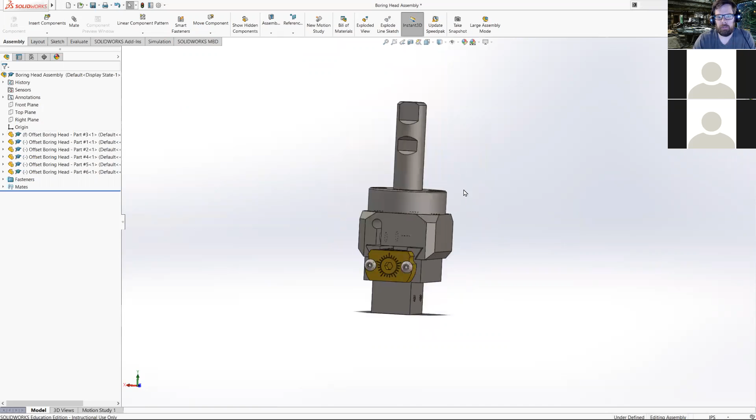All right, so yesterday we talked about how to create our assemblies. We talked about mates, and kind of the big takeaway yesterday, I think, with mates is they really behave just like sketch relations do. So that's kind of a better way of...

Hold on just a second, I'm going to... there we go. So that's they work kind of the same way, right? So we are creating, in a sketch, we're creating relations from a line to a circle, right? So like a line being tangent to that circle, that's our relation. How long the line is, right? That's a relation.

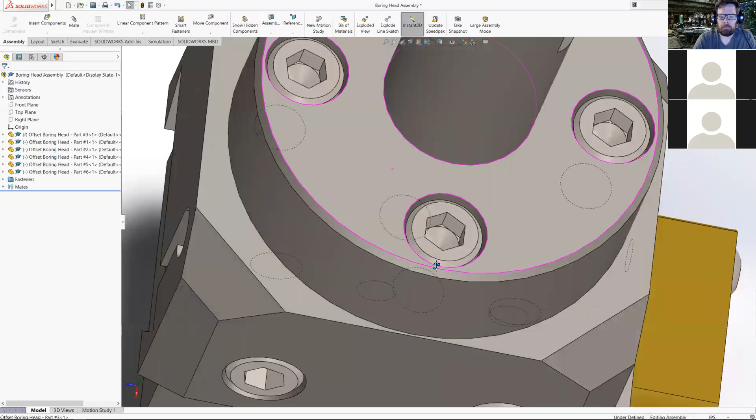So in assemblies, we're basically doing the same thing. It's just instead of having a relation between two pieces of geometry - a circle or a line, or two lines or two circles or whatever that may be - now we're creating relationships, or mates, is what they call it in SolidWorks. These mates are what our relationships are between our parts. So like that screw is concentric with the hole that it's in. The bottom of that screw is coincident - it's occupying the same plane as the bottom of the counterbore.

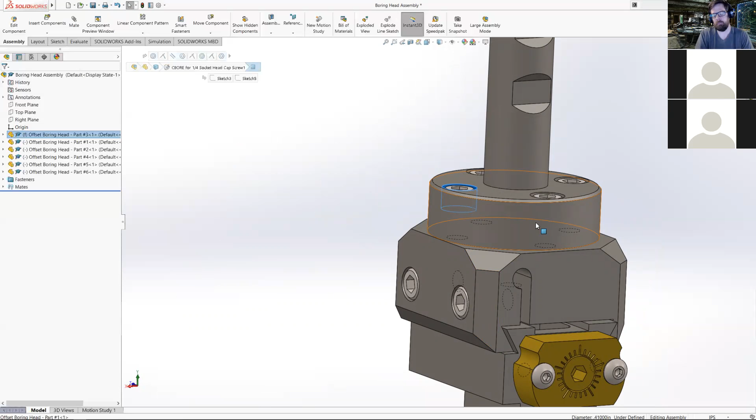So as mechanically inclined people, we should be able to look at these and infer - well, I know how this part's going to go together, so I can look at my mates and hopefully figure that out.

Another thing to think about with mates and relations is it really kind of ties in with GD&T, right? So a lot of the same terms that we're getting in GD&T, we're also going to have in mates and relations - concentricity, coaxiality, flatness, parallelism. Those are all GD&T tolerancing. I can't remember the name of it, but those are always tolerance in GD&T, or create tolerances.

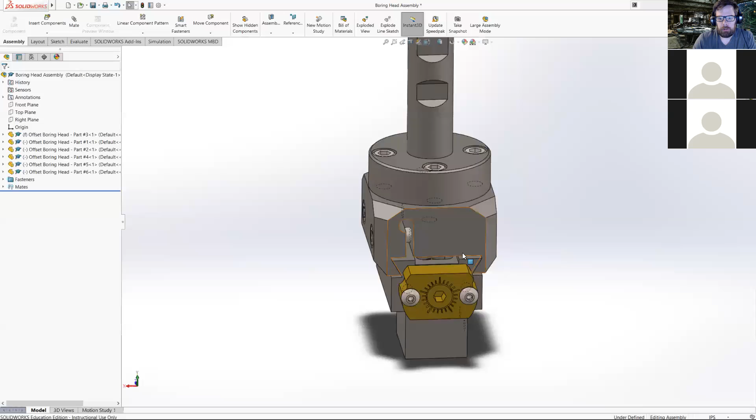So that's kind of another way to think about it. So yesterday when we were going through here, one of the things we noticed was my holes didn't quite line up correctly. They usually should, if we create our geometry correctly, if we create our parts correctly, all of our holes should line up.

But inevitably, something is not going to. So yesterday you saw me - I like to create folders for my fasteners. This is more detail than I typically get into, or more folders - like I have a folder with one screw in it. But this is just to illustrate how I like to do this, especially when you have assemblies with dozens or a hundred fasteners in it. It can get out of hand pretty quickly.

This helps me organize things and also comes in handy for what I'm about to do. In order to evaluate the clearance between the holes in these two parts, I have to look in this hole, but I obviously can't see in there.

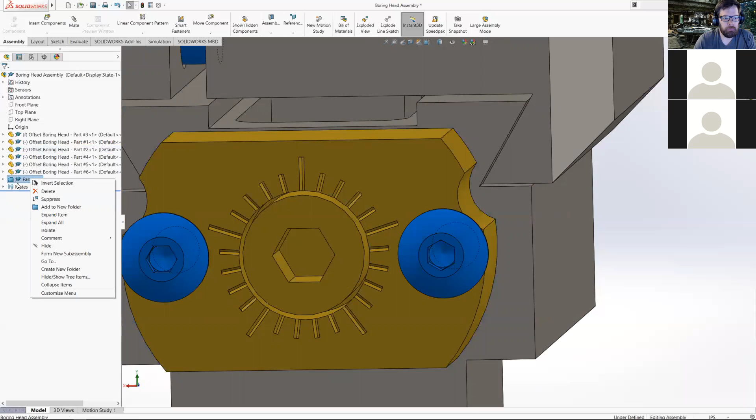Because I added all these into one folder called fasteners, I can right click on this and just hide them all. Instead, if I didn't do that, I would have to go in there and say, alright, these are my 8-32 buttonhead cap screws, and hide them one by one.

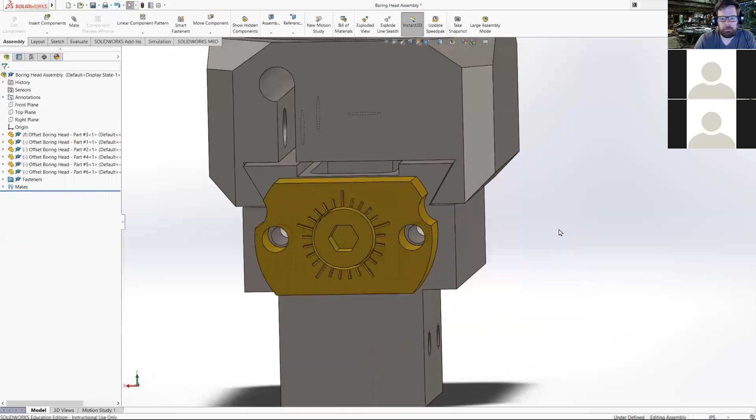It kind of speeds up the process when we have to do stuff like this. Also, sometimes you're not going to want your fasteners in your print - if you have an assembly print, you're not always going to want all the fasteners in there. So anyway, hopefully I'll get square on it.

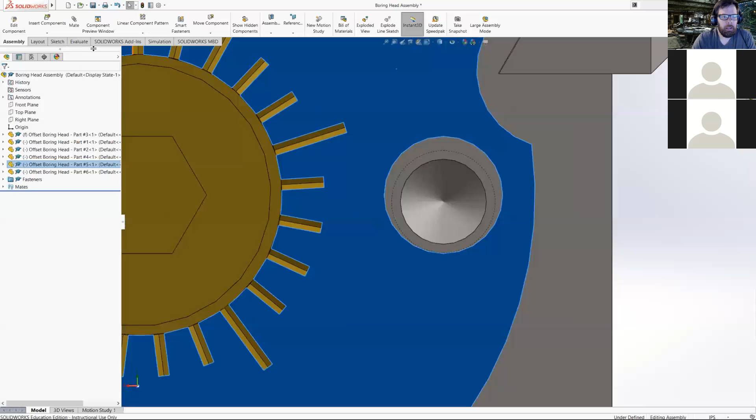My threaded hole does not match my clearance hole, and so I can use different evaluate tools. I can see what the hole alignment is, but really one of the best tools to use for this is our measure tool.

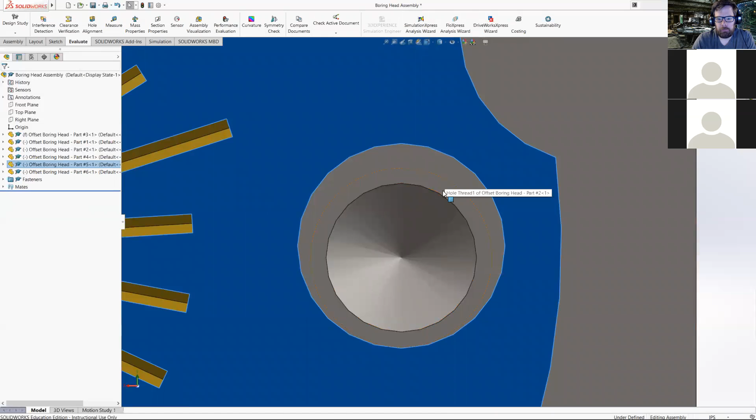One of the things that really alarms me here - does anybody remember what this dash circle around this hole represents? Isn't that the threads? Yeah, so that's the major diameter on our threads, so that is a threaded hole.

There's a threaded fastener that's going to go in there, and this hole is going to determine where this part is spaced on my assembly. So if this shaft is determining where this is located, I can't really push this down to get these lined up, or else I'm going to bind up on the shaft.

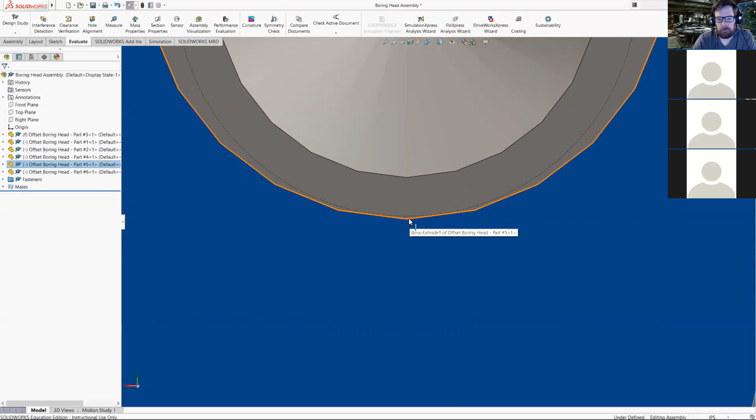What really alarms me is if I look at this, the threaded portion of this hole lines up or is almost tangent with the bottom of that portion. Right off the bat that scares me, that's a red flag, because what's going to happen is when I put a screw in here, my screw is going to be rubbing along the bottom of this if I make it to these dimensions.

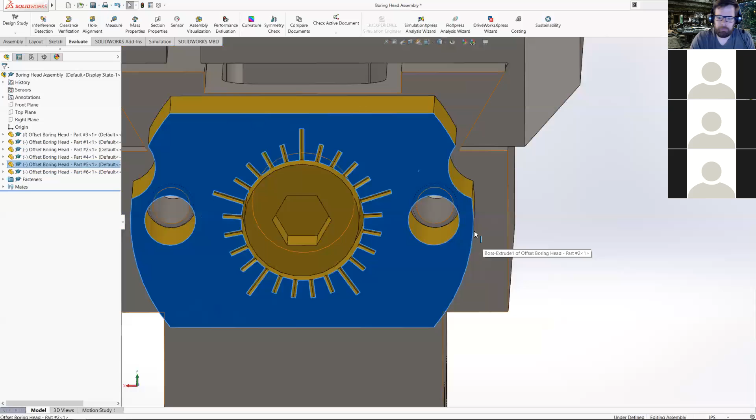I already looked yesterday after we got off and figured out exactly what was wrong. One of the ways we can figure out how misaligned these are is using our measuring tool, which is in our evaluate ribbon. So we go to measure, just up top here.

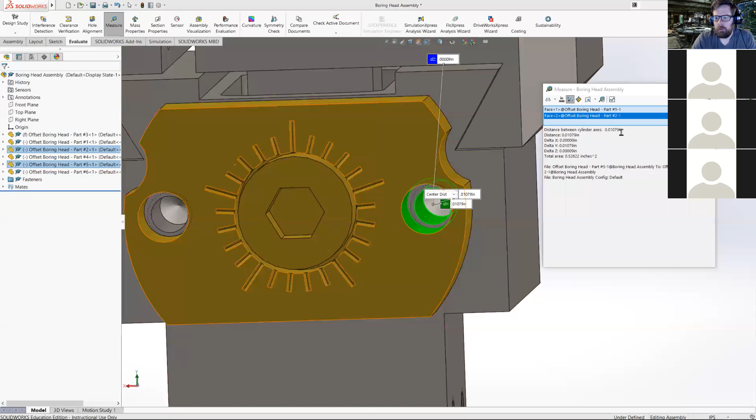Click measure, and then all I'm going to do is select the inside of that cylinder and the inside of this cylinder. Right off the bat we get this pop up - so I am off in Z. Well, that's not very helpful, right?

So Z is going to be going through this hole - our Z-axis is coaxial with these two holes, so the axis of these two holes is actually our Z-axis. I'm not sure what our 900 thousandths is, not really sure where that is coming from, but our delta Y is what we're seeing - the delta Y is about 10, almost 11 thou, that this hole is misaligned.

That kind of jives with what we're seeing, because in a hole that small, I'm probably going to have 15 to 20 thou clearance. If my hole is 10 thou off, and half of my clearance is gone in a hole that has 20 thou clearance, I'm going to be rubbing the bottom of that - rubbing my threads, or cutting my threads, dragging my threads across this part.

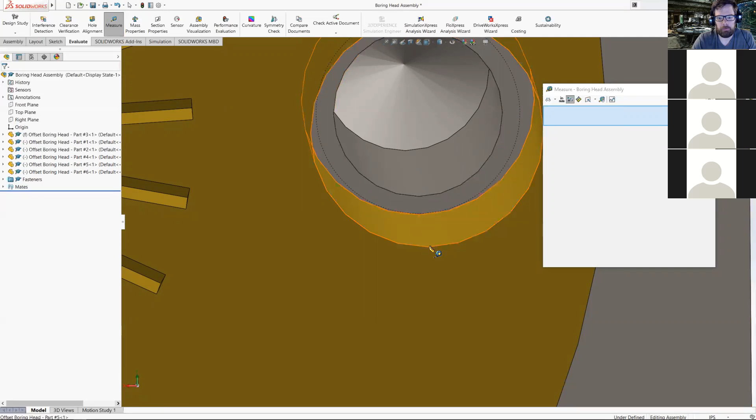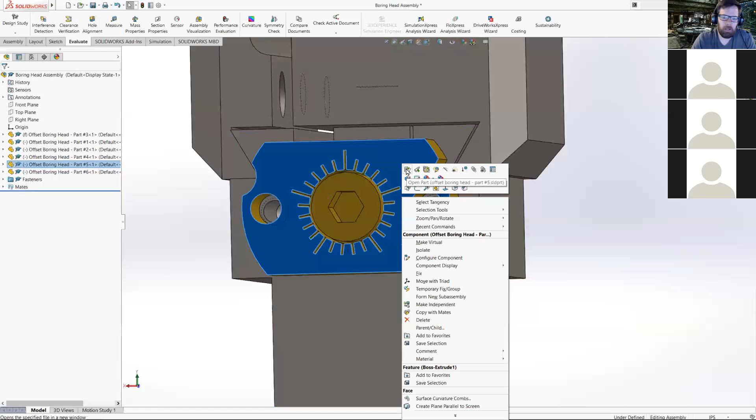So what's the problem there? Well, we don't have to, but we can edit these parts in place. If I right click on this part, I can go to edit part, which is the fourth option, top row from the left in that right click menu. Open part is the first option in that top row, and that's typically what I do. Now I already have these open, so they open very quickly.

But if I look at my print for this guy - oh, wrong one. This is part 5.

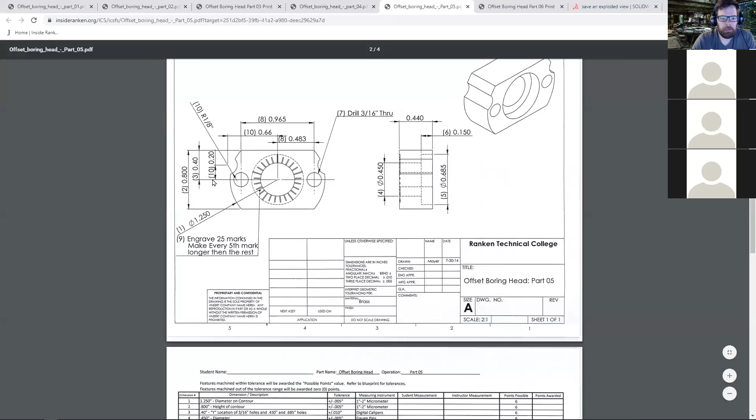So when I look at my print, all 3 of these holes should be aligned, right? I have a big hole and 2 clearance holes, and they're all 400 thousandths from the top of that part. If I look at part number 2, we have the same thing. These holes should all be in alignment.

So when I look at this guy, that's what I'm going to do. I'm just going to take my measure tool and click on these 2 cylinders. So what I should be looking for is, if I look down in this bottom left corner, I have my gnomon. And so I know my misalignment as far as this part is concerned is going to be in Z.

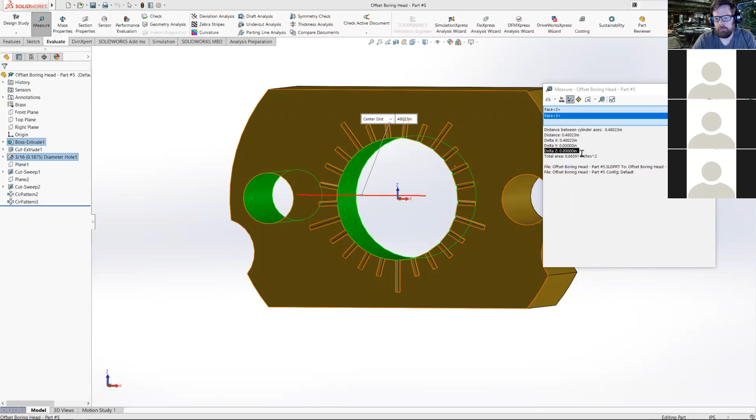So if Z is misaligned, then this part is the error. The error is in this part. Well, when I do this, I look at delta Z, and my delta Z is nothing, right? My delta X is going to be my center to center distance, but my delta Z for both of these is nothing. So I know that this part is correct, so I don't need to do anything with that guy.

But if I go back to part number 2, which is going to be this guy, if I open up part number 2, now I can do the same thing. I take my evaluate measure tool, measure the inside of that cylinder, measure the inside of that cylinder. Oops, I already had the face selected. So I measure the inside of that cylinder and the inside of that cylinder.

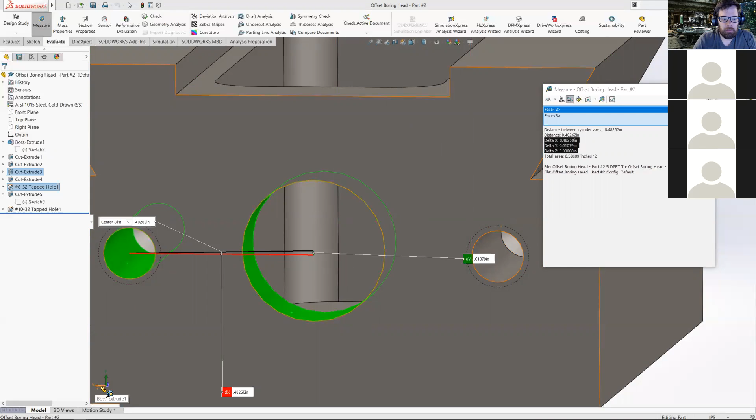And now I have a delta Y, right? So I should really only see a distance in one of these, a delta in 2 of these distances, because distance is also the delta. But delta X, Y, Z, I should really only see something in one of these because these are supposed to be aligned along my x-axis. So my delta Y is the part that's wrong.

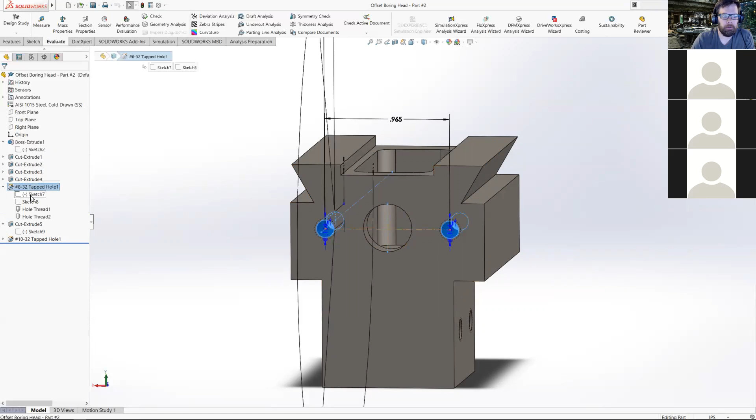So the good news is I can just go into the hole wizard sketch for those holes. We can do this a couple ways. If we select that hole in my feature manager, that hole gets highlighted. Or if I just know what hole that is, I can go over there and highlight it already. I'm just going to click on that first sketch underneath it, and I'm going to edit that sketch.

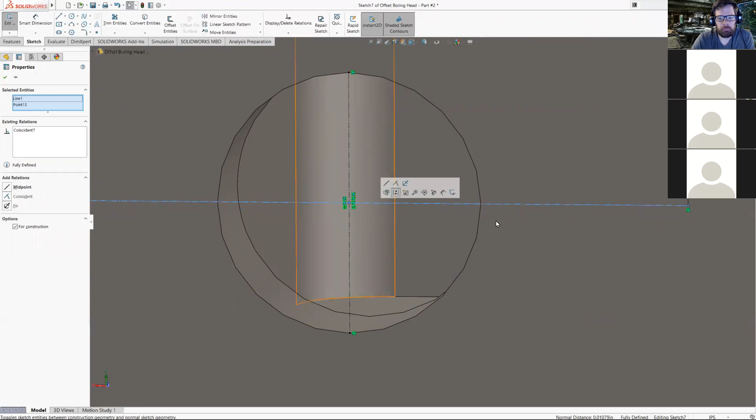So what I tried to do is put a center line in the middle of this guy. As you can see, hopefully, there's the center point of that line, and there's my center line that's connecting these 2 holes. So what I can do is click both of these, select my midpoint and select that line, and make those coincident. And that raises my center line that's determining where these holes are located.

And so now when I do a measure between those 2 holes, now I don't have anything. Now I don't have any delta Y. So now I know that these have a horizontal relation to each other, and that would be the ideal, is to create a horizontal relation between these 2 holes and this hole, but that doesn't really work because you have to select the middle of the hole, and that sometimes doesn't.

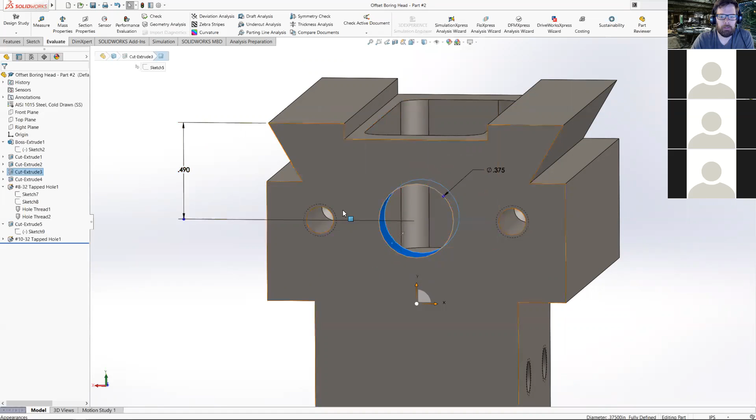Sometimes SolidWorks doesn't let you do that. Other times it does. It seems like when you use a cylinder like this, or cylindrical hole, it doesn't like it as much as if you had just geometry on there.

So anyway, we got that guy, and then I'm just going to save him and take it back to my original assembly. And because I changed this model outside this assembly, I'm going to get this message: models contained within the assembly have changed. Would you like to rebuild the assembly?

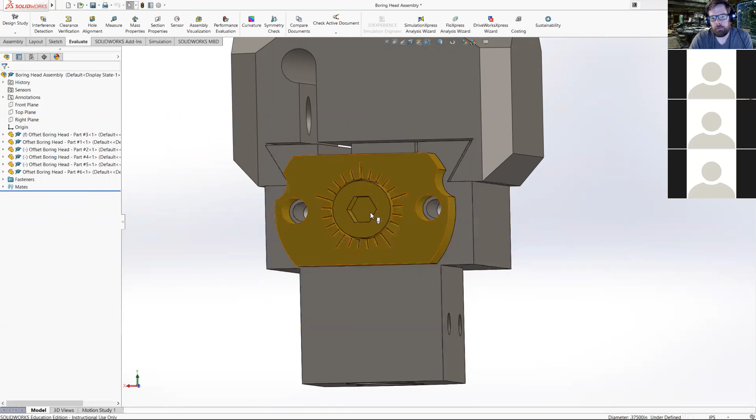It didn't even let me answer it. So what it does is it uses this little stoplight up here. This is our rebuild button. So if I make a change in here, it's not going to make that change automatically until I click that rebuild button.

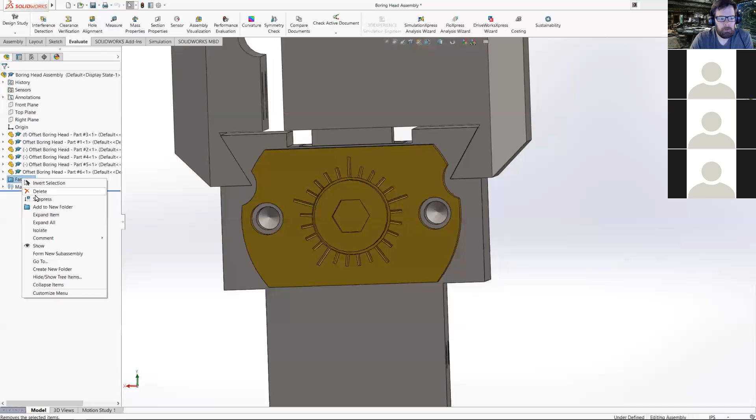But now, hopefully you can see, my holes are lined up much, much nicer. I still might have some sort of weird error. No, cylinders are coaxial, right? So now I know those are exactly where I want them to be. So I can turn my fasteners back on and I win.

All right, so that's just kind of one of the ways we can troubleshoot our hole locations. Like I said before, that's really one of the big strengths of CAD is we can look at these models and figure this out before I make it, right?

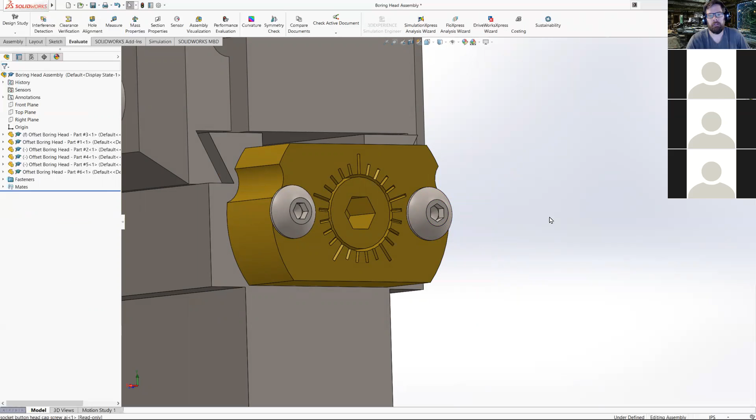So say I draw this up and I forget to put that dimension on there or whatever, and they make this part, or I use a CAM software and don't really measure my original part. Well, then I put this all together, and that's going to be a problem, right? So I'm either going to be looking at making a new part, drilling these holes out bigger. I'm going to have to make some sort of correction, most likely. Maybe those screws would fit in there just fine, maybe not.

Don't want to play that game. So, does that make sense for everybody?

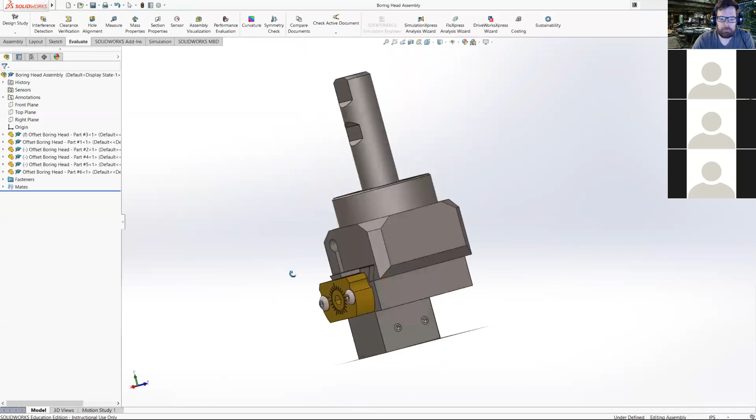Yeah. Okay. So our next step is we got this assembly, and now we need to create, well, we don't need to create, but I like to create prints of my assemblies, right? Because one of the problems, and we run into this in this class, is you have an assembly that has 5, 6 parts in it and no assembly picture. It can be kind of hard to figure out how to put it together.

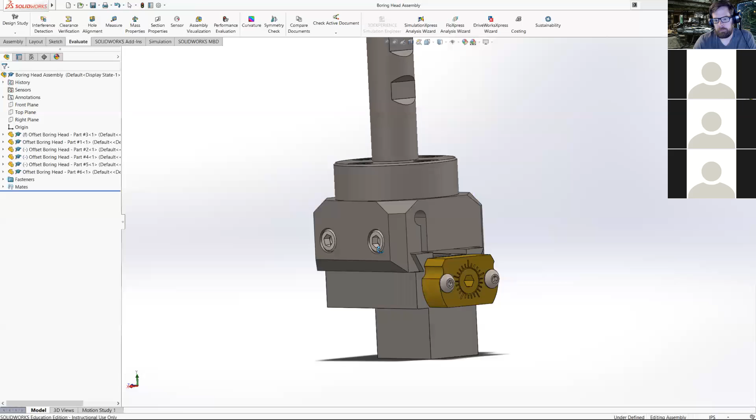So in this setting, I like to include an assembly drawing, but I really like to do that anytime I'm going to be handing this off, right? So anytime I'm going to be handing this off to somebody, I like to put some sort of assembly in there, or an assembly print is very, very minimum, and some other features that are also helpful.

Big reason I like to do this is because I can create a bill of materials. So bill of materials is just going to be a print that lists all of the different parts that are in here. Sure you've seen these before, a schematics drawing or something - you buy a vacuum cleaner or whatever, and in the back of the manual has a blow up of the entire vacuum cleaner. It has all the sub-assemblies and all the parts labeled and all that stuff.

So we're going to kind of go over how to do some of that. Nothing like we won't be doing a vacuum cleaner, but we will be doing this guy. So to create - oops, wrong button. So in order to create a drawing of this, it's just like creating a drawing of anything else. We're just going to make drawing from part assembly.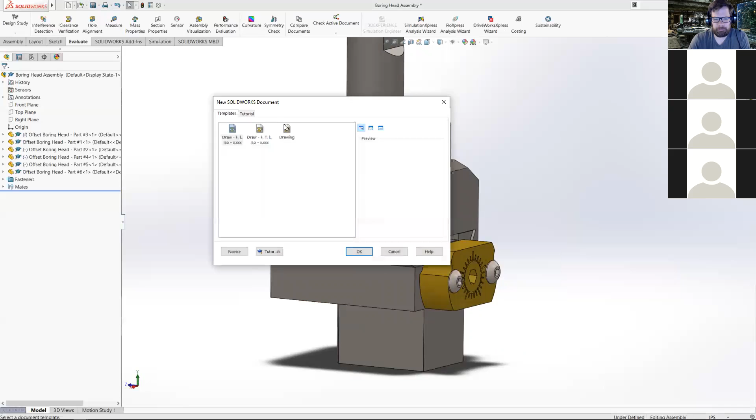And I'm not going to use either of these templates, I'm just going to use my generic one. So we're going to do landscape. And so there we are. So right off the bat, I like to kind of just do a three view.

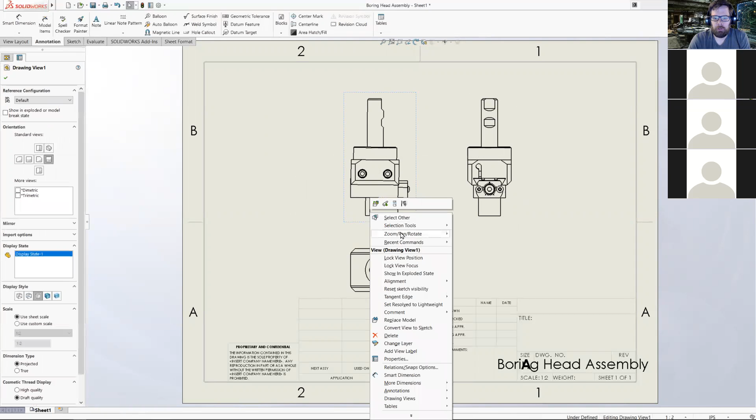Oops, I hit that. All right, so pretty straightforward, but this might look better if this was laying down. So I'm going to go ahead and rotate that. I'm just going to right click in that view, zoom, pan, rotate view. I'm just going to turn it 90 degrees. Oops, 90 degrees. Oh, come on. There we go. We'll close, and there we go. So I kind of like that. I think that kind of works a little better.

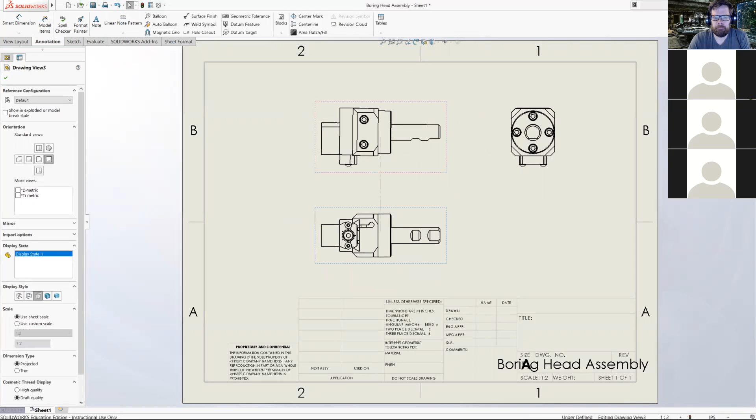If we wanted, we could add a 4th view. Kind of gives us some more information. All right, so this would be just kind of a general outline or layout of what this assembly is.

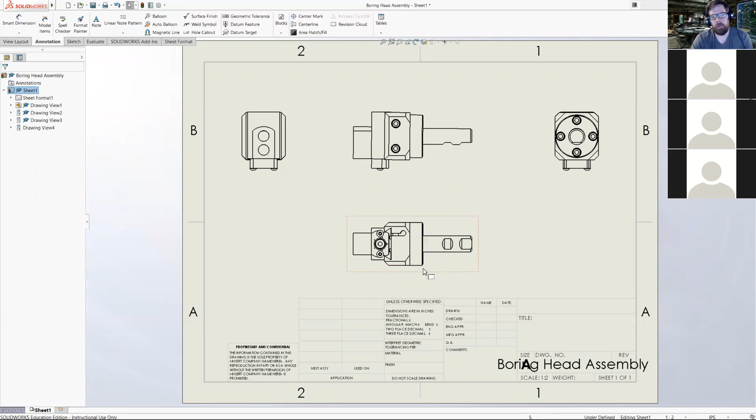But in this, what I also like to include is a bill of materials and an exploded view of this, right? Because this kind of tells us what this is going to look like when all of our parts are together, but it doesn't really tell us much about how this actually goes together. Before I do that, I'm just going to, because I'm nitpicky and this always annoys me, I'm just going to change that.

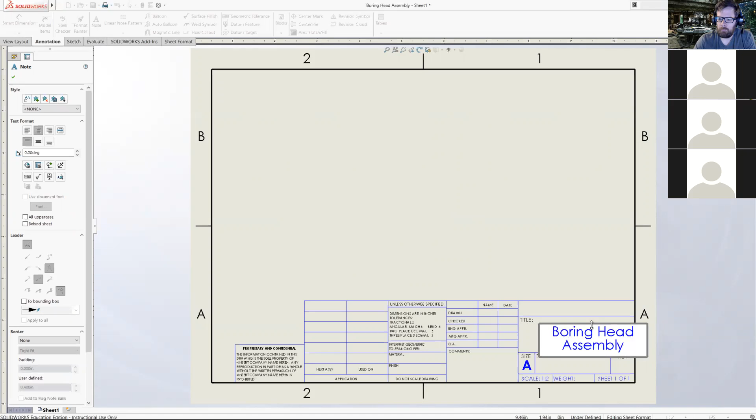There we go, okay, that makes me feel better. All right, so from here...

If I wanted to create a new drawing, there's a couple different ways. I can create a new file, or if you look down in the bottom left, we have sheet 1. We can actually create many sheets of this one blueprint. This is nice because, just like in Excel or many other programs, we can create new sheets and then select all of them for printing, or just one, or whatever.

Because I already made some small changes on here, I'm just going to do a copy paste. If I right click and select copy, then right click that first one again and hit paste, it's going to ask if I want to paste this before or after selected, or move to the end. I'm just going to do after selected. Now I have basically the same thing, but I'm going to delete my views out of it.

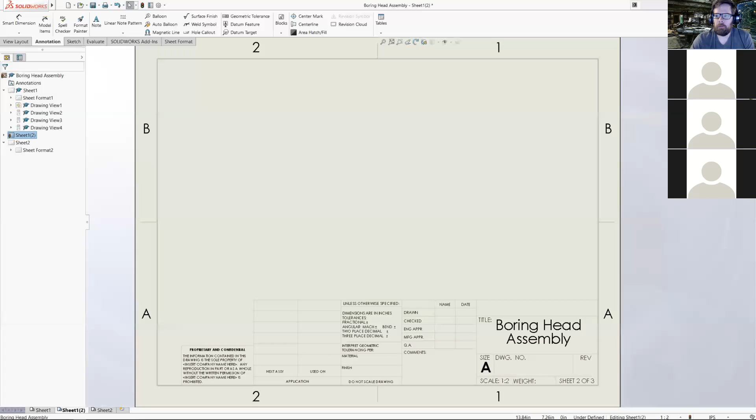It's just easier to do it this way than to delete those views and go into your title block and re-edit that. So from here, what I'm going to do is put in my assembly view, and go up here to tables.

When I click on tables, there are lots of different tables we can do. We'll talk about some of these. General table is just, if you know what information you're going to put in there, that would be your table. It's just going to create a blank, like a blank Excel spreadsheet.

A hole table is going to list hole locations on our parts. Not super useful for any of the parts we have, but we will actually go over that. Bill of materials is what we're going to do. And we have revision tables.

If this is a part that has been revised a lot, we can create a revision table up here. A revision table says, hey, in 2018 or April 2018, we changed this feature, and this is a very brief discussion of what it is.

What that allows you to do is, say you have an independent contractor that makes parts for you. This used to happen to us at Sanks. We were an independent contractor and we would make parts for these other companies. Sometimes they would make revisions to these parts. Lots of times we would keep our blueprints there, so we had file cabinets full of blueprints from different companies. Most of them, if they did care that we were keeping them—Sanks didn't care.

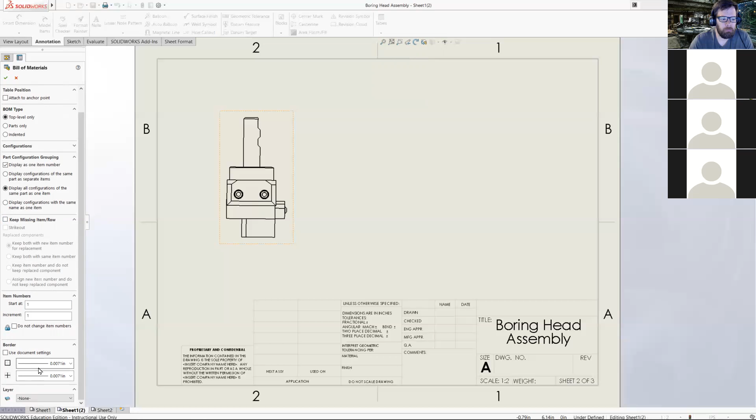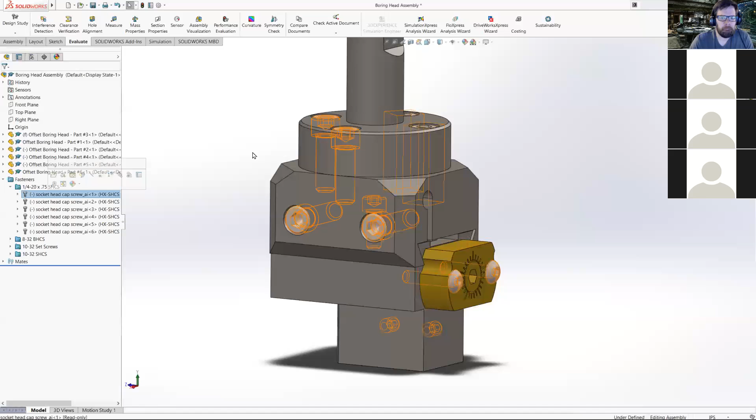So we have quarter 20s, 1, 2, 3, 4, 5, 6 quarter 20s in there, and it's counting 6 of them as a number 10. At least I'm pretty sure they're number 10s, or a quarter inch. Yeah, those are quarter 20s. So that's fun. Obviously this doesn't always work out perfectly, but what we can do is we can kind of modify this so it's better for us.

Right off the bat, looking at this, you might go, well, that description column is pretty useless, right? There's no information in there. In this example, our part number, we could put an MSC part number or McMaster-Carr part number, or whatever your supplier is, but I just put the fastener size in there. So what we're going to do is just delete that column.

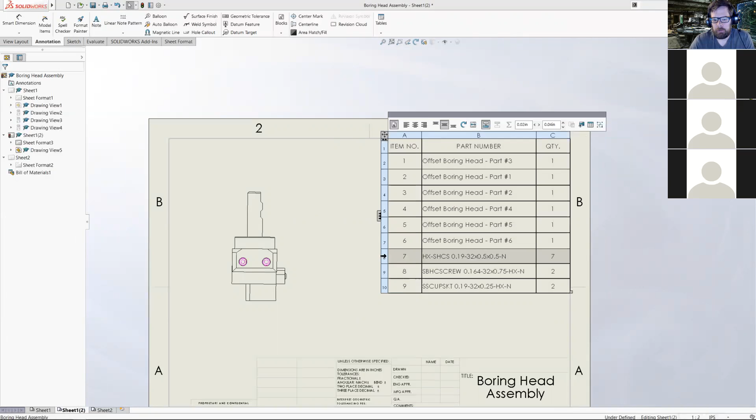And now we have a more streamlined version. We can still change column width, and we can change column height or row height and all that. So what I'm going to do here is actually insert a new row.

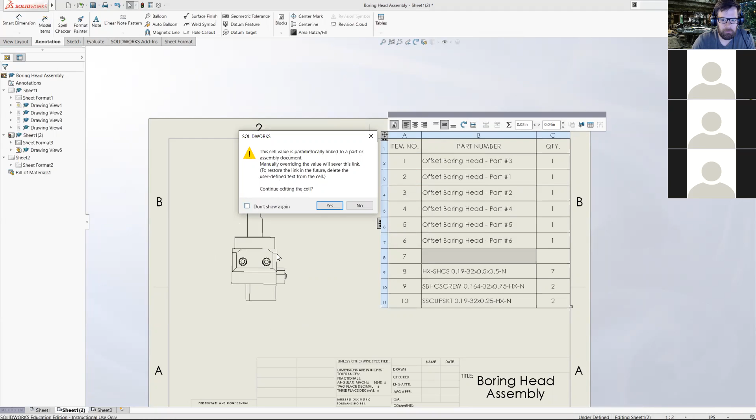So I double clicked in there. If I just double click in there, under normal circumstances, it'll let me edit it, but now I'm going to get a warning message. So this is kind of the quick and easy way to fix this, but what this will not do is maintain a link to the original part file. I know I'm not going to need it to revise this, so I'm just going to continue editing the cell, because what's going to happen is it's going to lose any sort of connection with this part.

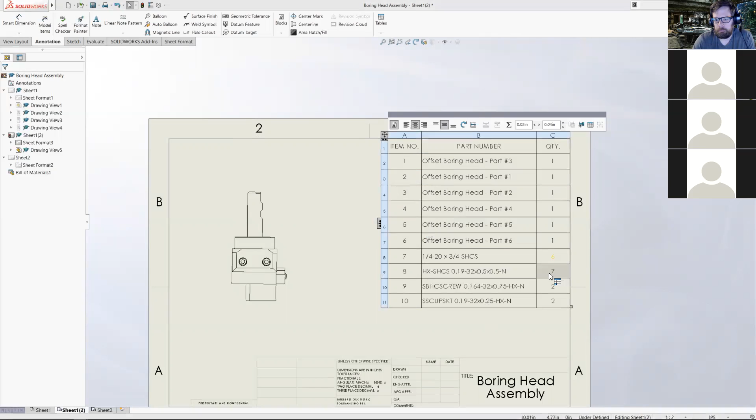And those were 1/4-20 by 3/4, I believe, socket head cap screws, and I know there were 6 of them in there. There we go, and then that's just going to be 10. No, don't show that again. So those are just going to be 1032s, not 1/10 32s, those are much bigger, those will be too big. 1032 by, I believe they were 1/2 inch, and that was a socket head cap screw.

No, that's why it linked them all together, because those were both socket head cap screws probably. And these are set screws, that's a set screw, and those are button head cap screws. So that's probably why. So it's going to be 832 by, well, I think it was a 1/2 inch button head cap screw, BHCS. And then we have those 832 set screws.

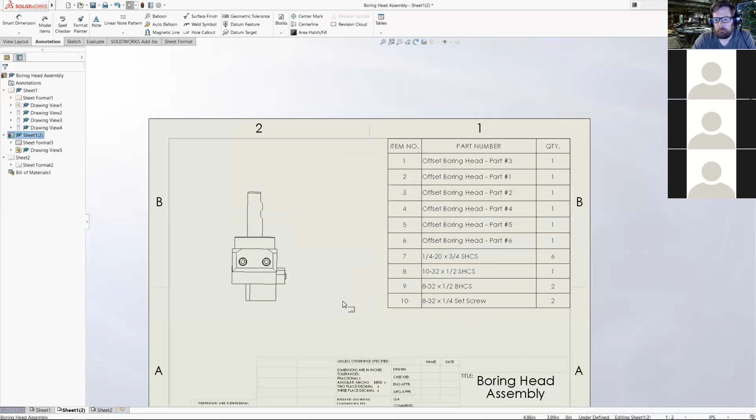And those were 1/4 inch, just going to change that to 1. Don't show that again. There we go, so that's more representative of what we have. Sometimes it's nice to blow that up also, make it a little bigger.

All right, so now we have a multi-view print, right? We have a bill of materials. And so now we're going to create an exploded assembly.

So again, I'm just going to take my original, copy, and then paste. I'm going to move this to the end. And so we can also rename these. So if I wanted to rename that, I could just say view 1, because that's so much more descriptive than sheet 1. And then this might be BOM, bill of materials. And then this one, let's say this is going to be explode.

All right, so we have our, actually let's rename that. Oh no, I didn't want to delete that. Oh well. Oops, well, good thing I copied it, right? So I'm just going to copy and paste.

Move before. Oh, it didn't. All right, so we'll rename this 4 view. All right, we have 4 views on there, so it's 4 views.

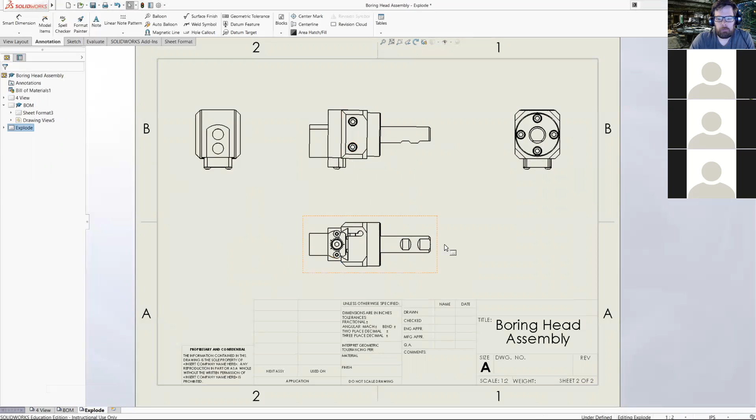So in the explode, we actually don't do the explode in a drawing. Before we can make the exploded view in a drawing, we have to make an exploded view in our assembly. So how do we do that?

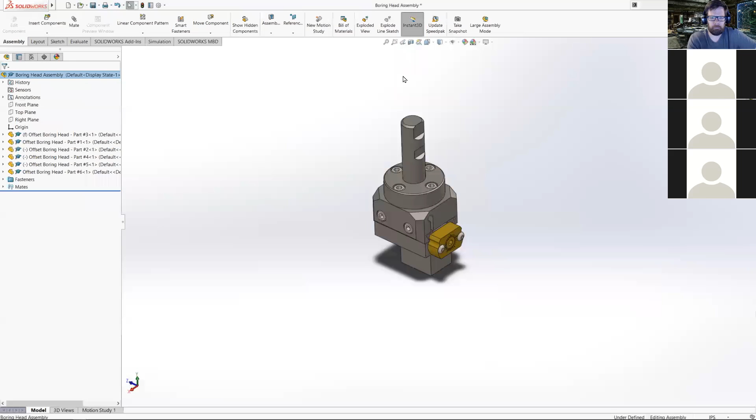Pretty straightforward. One thing to keep in mind is this doesn't actually save a view. This was kind of a tough thing for me to wrap my head around when I first started making exploded views. You make an exploded view and it doesn't save anything. So the tricky part is you make this exploded view and then you're like, well, how do I display that? Well, it's pretty straightforward and we'll get to it in a second. But let's first do our exploded view.

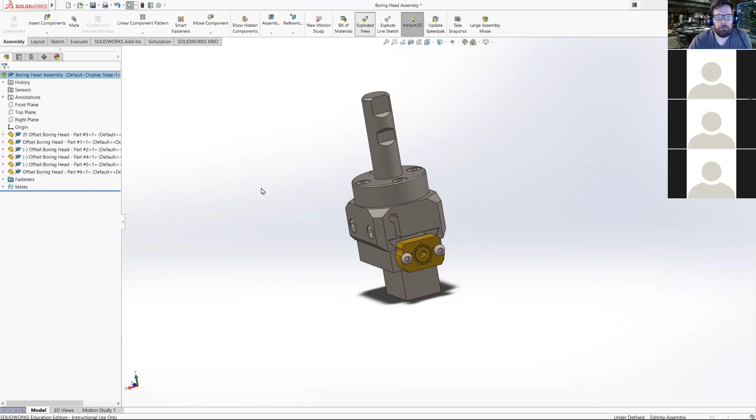So what that's going to do is allow me to select different parts at a time. Since this part connects vertically onto part number 1, and this guy slides out of part number 1, I'm going to use part number 1 as my base. So part number 1 is the only one I'm not going to move.

I'm just going to select that guy, and basically how you do this is you drag it around. I'm going to drag this up pretty far because I want to pull this screw out of here. That screw is kind of hidden in this assembly, so somebody putting this together might easily miss it. If I put that in between these two parts, it's going to be a little bit harder to miss.

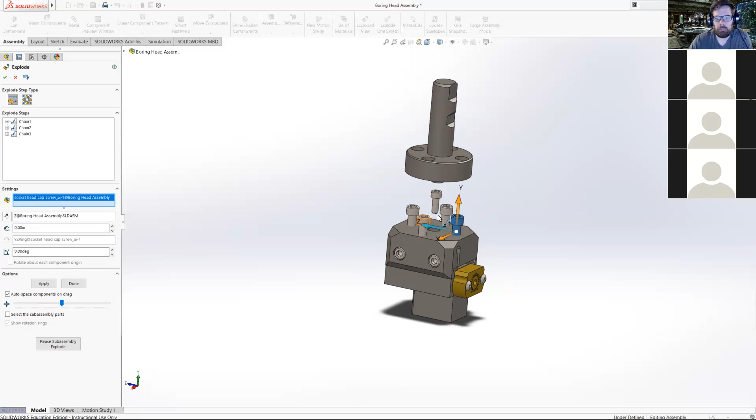So I probably put that guy up just a little too high. I'm going to move him down just a little bit, and then I'm going to move these guys up. Oops, no.

Ah, damn it. All right, so my exploded view reset, because I pushed the wrong button.

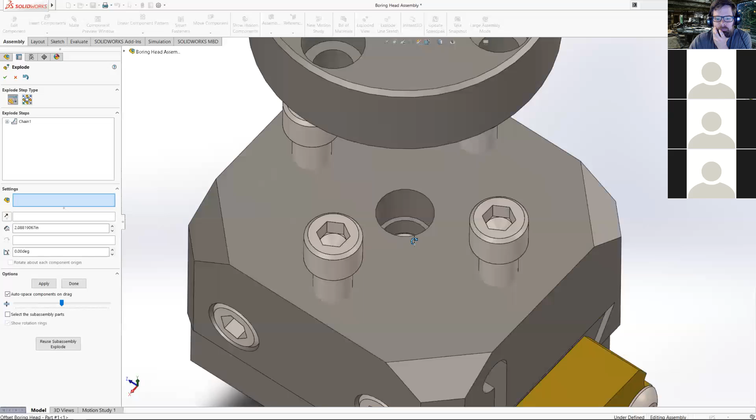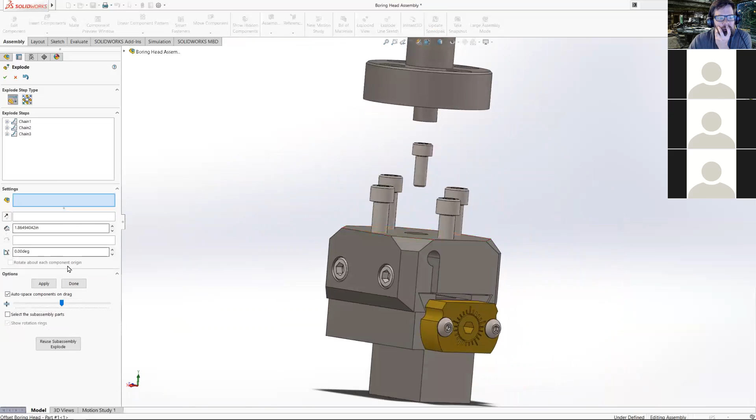So I'm going to select all 4 of these screws. Just going to drag. What in the heck is that? So I'm just going to delete that step.

Man, what is going on here? It just really does not want me to select these guys.

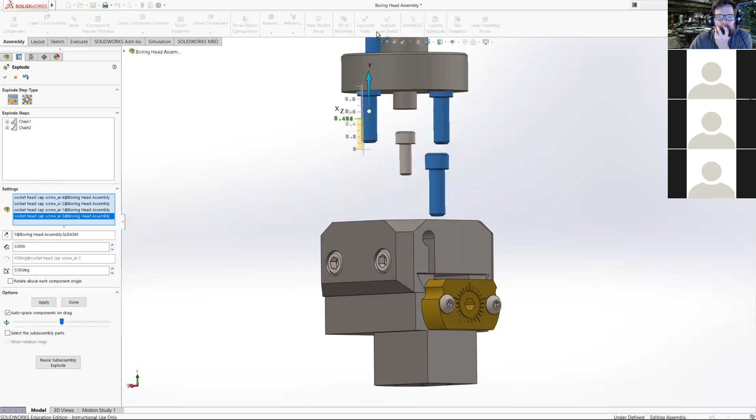There we go. Okay, so now we're just going to drag all of those up. Why are those not going? Why are those not locking together?

Here, I'm going to try this again. All right, one more time. So I think it might have been this auto space components on drag setting. There we go.

All right, so I'm going to put those above that hole. Move him down a little bit. Got a little out of hand there.

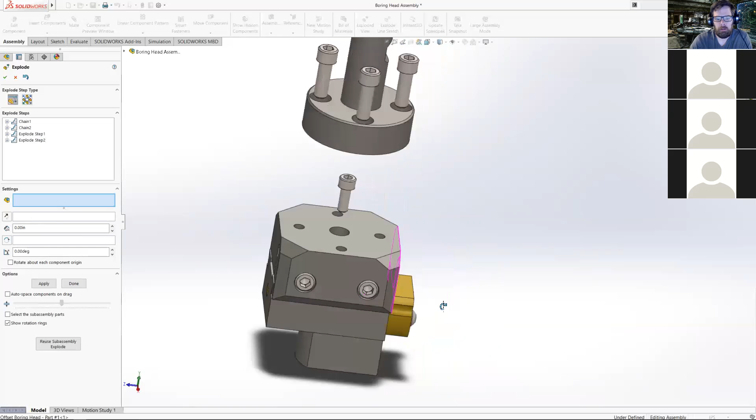All right, so then we got these two screws here, and we're just going to pull those out. So as you can see, we're just going around selecting all these different components and dragging them out. If I drag this out, it would be basically these three parts.

Oh, forgot my set screws.

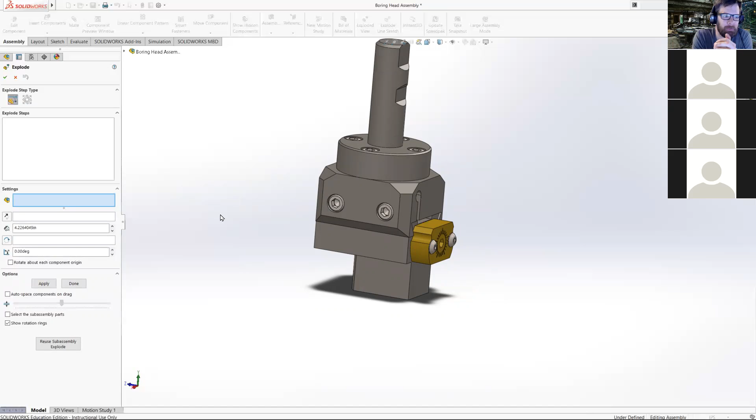Oh, Christ. This is the most frustrating part about the explode. So you can't hit escape. You can't hit escape during explode, because what it will do is it will just get rid of everything you just did. So that's why you've got to see me do this 3 times, because I'm like an escape junkie here. Apparently I just can't stop, guys. Can't stop hitting escape. Gonna get clean one of these days.

Don't worry, all right, let's try that again. We're gonna pull him up. There we go. We're gonna get these guys out. Now this time I won't forget the set screws.

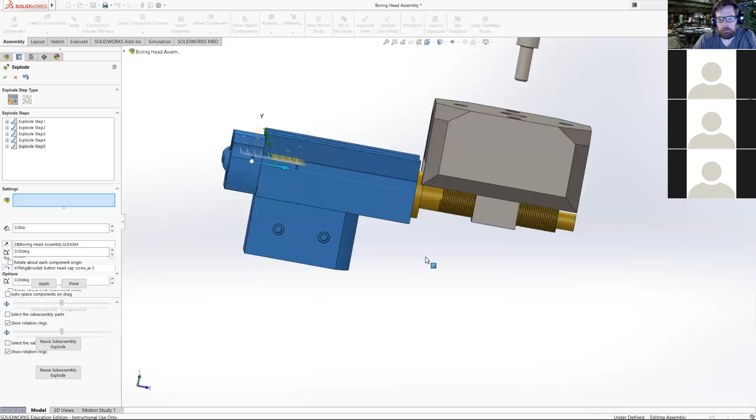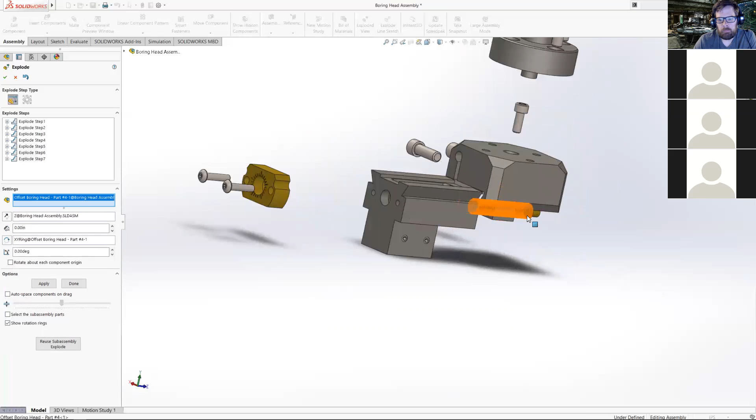Now we're just going to drag him out, so he's barely out of this part, because this is going to get out of hand if I don't do that. I'm going to select these two or three parts, and then I'll select these two guys, and then he goes in between, and that's going to come down.

All right, so that is basically how these parts go together. So I'm going to click OK, and now I have created an exploded view.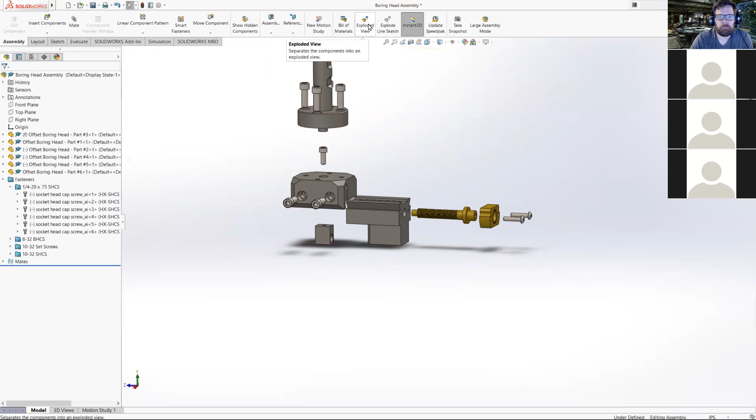So if I hit exploded view again, it's going to get rid of that, right?

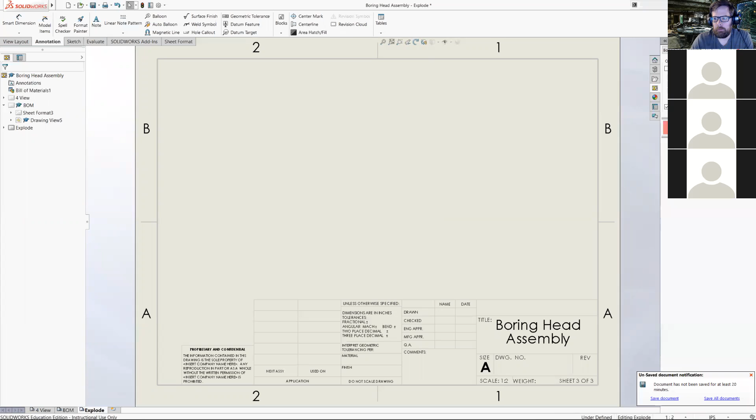From here, when we go to our print, all I'm going to do, so I have my empty space here, I'm just going to regenerate that. So I made a bunch of changes to my assembly, and when I did that, my views were not visible. If you click this little refresh button, it will reload. Basically what it does is it rebuilds your assembly, and then you can load it in there.

Oops, not that one. So I'm going to do my right view. I'm going to get rid of that guy, so that's not a very good view.

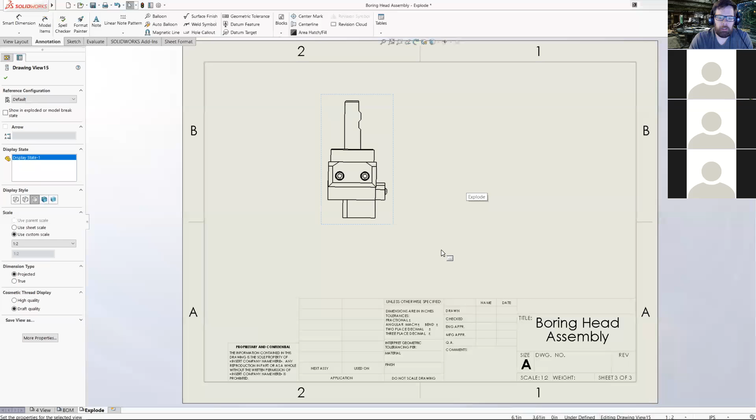All right, so now, how do I get my exploded view into my assembly or into this drawing? It's really up here at the very top, show in exploded or model break state. So when I do that, it's going to give me a couple choices, right? So every time I did that, I guess I could have gone back in and edited them. But basically what's going to happen is it's going to have your exploded view.

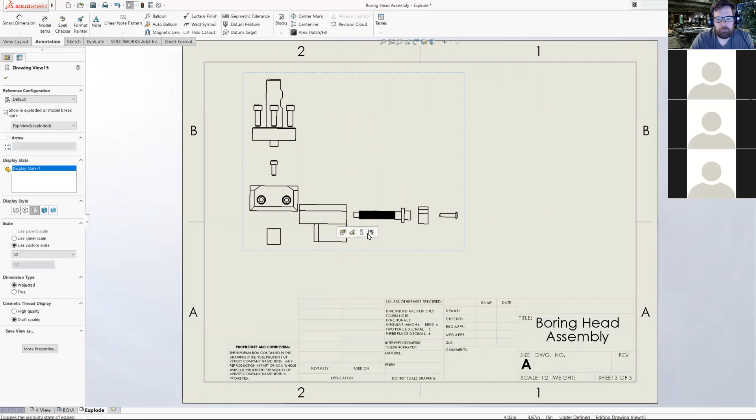And now, this is kind of cool, I can do projected exploded views. So I could have that and then have an ISO model outside of it. Or I could say, hey, I think that ISO model is way clearer than this front view or side view, so I'm just going to have that in there only. Right, so that's pretty cool.

But one of the things we can also do is, say I wanted to do this and actually have my bill of materials on there. So I could take that bill of materials table and just hit Control C or do a right click copy, and going back over here and then paste it. Oh, apparently I can't. What?

Huh, what the heck? Let's see if I can do it this way. Control C, Control V. Nope.

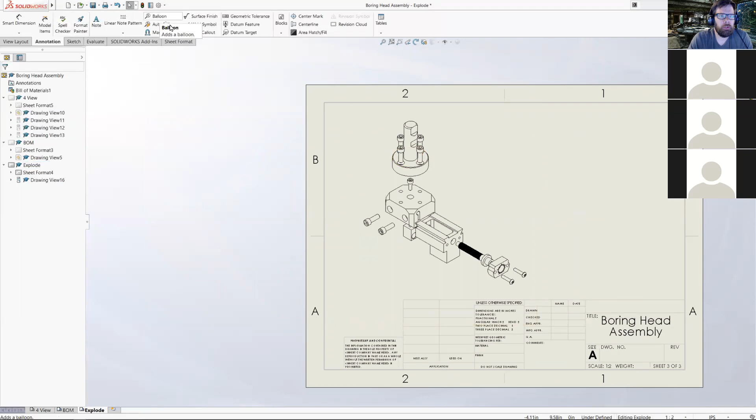Okay, well, I guess we'd have to create a whole new bill of materials. But what we can also do is auto balloon. So right now, in our bill of materials, we have this bill of materials here. I guess I could also just say that's an exploded view, yeah, that might be easier. So I have my bill of materials here, but I don't really know which of these parts is which.

So if I select this view and then do auto balloon, what it's going to do is go in and automatically label all these parts for me, or at least the ones I can see in this view.

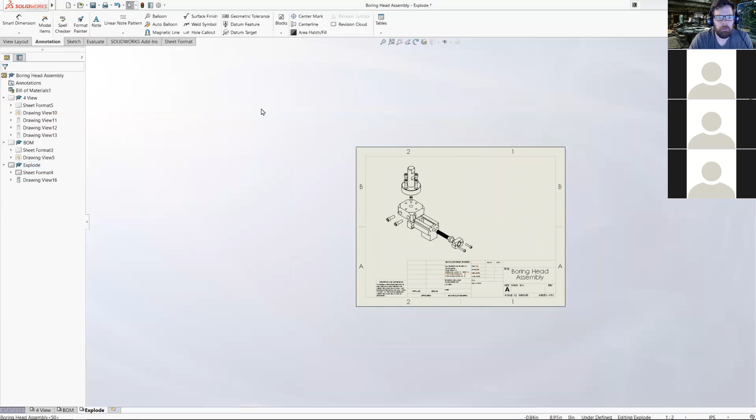If I go to my explode view and I do the same thing, let's see what happens. Yeah, so since we have more of these parts visible in here, it's going to have more of them in there. Oh, come on.

And so then we can adjust them. These work just like all of our other callouts, we can move this around. You can see that when I take this pointer off of this part, it loses this number, and when I put it back on there, it gets it back. So if you're dragging around and you're like, why does it have this weird question mark in there, it's probably because the end of your pointer is off of your part. You can move it around, but it still needs to be touching the part.

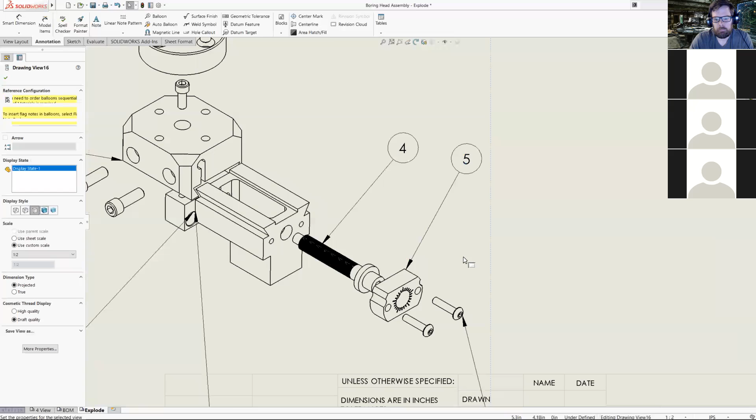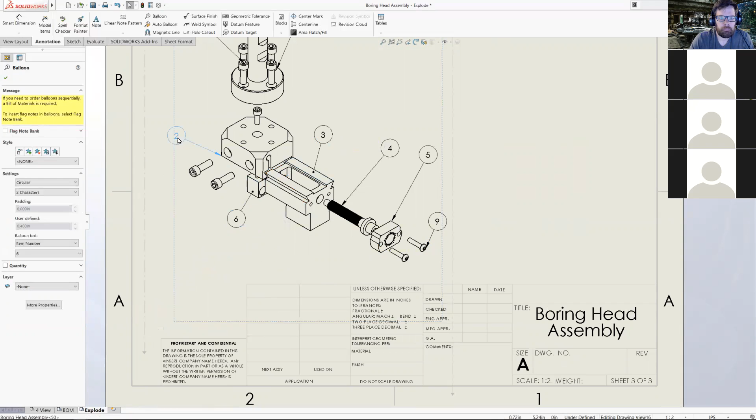All right, so you can probably imagine that this is pretty useful when creating schematics, kind of really helps with keeping things organized and straight. I just like to kind of bring these in a little bit. So there we go.

So, right, today we went over how to troubleshoot our hole alignments, because I goofed that up yesterday, didn't draw my part correctly. And that's going to happen, right? We've seen it already, Solidworks will infer relations between geometry as you draw it, but it won't necessarily save that geometry. So you might think that you're drawing this line vertically or in line with another line or whatever, but then you change something in that model and it will change that geometry. So nothing is locked in until you lock it in. And that's what happened with me, I made that line and thought I had it centered on that hole, but apparently I didn't. So we talked about how to troubleshoot, how to change hole alignment and location.

How to use that evaluate and measure tool, and how to create an exploded view. Exploded view is pretty straightforward. The most confusing part, at least in my experience, is that you have to create your exploded view in your model. The cool part is, at least as far as I know—I don't know where you get to all the different exploded views that are already created in here. Don't know, is it in annotations? Nope, don't know where it is. So if you can find that, that'd be cool. Yeah, that'd be awesome.

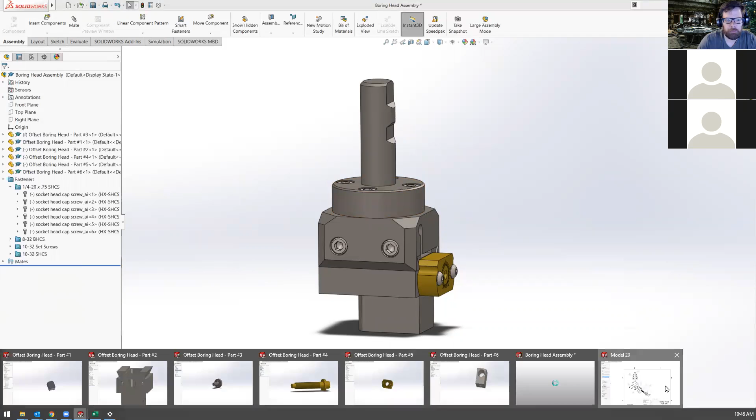We created an exploded view, and we're basically just saving that as a configuration of that assembly file. Then when we create a drawing, we can designate that drawing as an exploded view and it will automatically change it. That exploded view option is just in that view properties box, the first check box up there. Then we went over bill of materials as well, how to create a bill of materials table.

It's pretty straightforward. Any questions on anything? Any problems? Any issues?

I have a question for you, Mr. Pakanowski. Do you guys know anything about the plan for graduation yet? Oh, he's gone. We don't. He might know something that I don't, but at this point, they are not sure what they're going to do for graduation. We have not heard anything you have not heard, or at least I have not heard anything you have not heard.

Realistically, with how things are looking out there, I'd be very surprised if anything happened this summer, to be honest, unless they decide to do some sort of virtual graduation. As far as getting 1,000 people in a stadium—I more meant like with the end of classes part. Oh okay. Yeah, I don't think they've set any sort of timeline on that, but we'd probably be looking at, well, there's 9 of you, so I don't think that would probably be that big of an issue, but I don't know. There'd probably be some sort of spacing out or something like that. But as far as having something really set in stone, we don't have anything. The biggest thing they're waiting on is the city of St. Louis, because Ranken's in the city, we have to go by the city of St. Louis orders. Yeah, and I have a feeling schools are not going to be one of the first things open back up. True. But I don't know, I guess we will see.

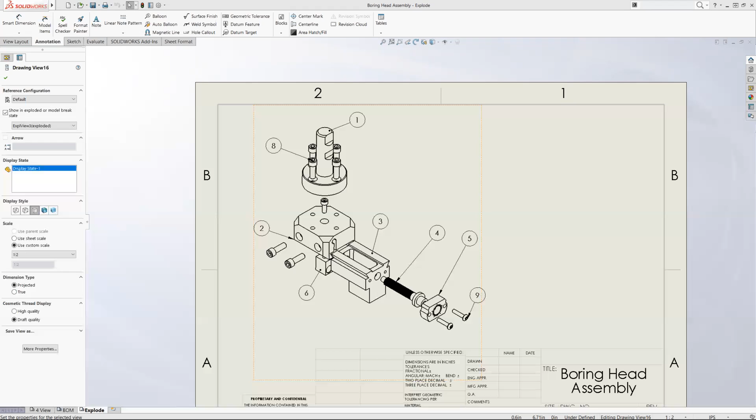I would probably give him a call or email or whatever, they'll probably go a little quicker than going through Paris or Mila or whoever. Understood.